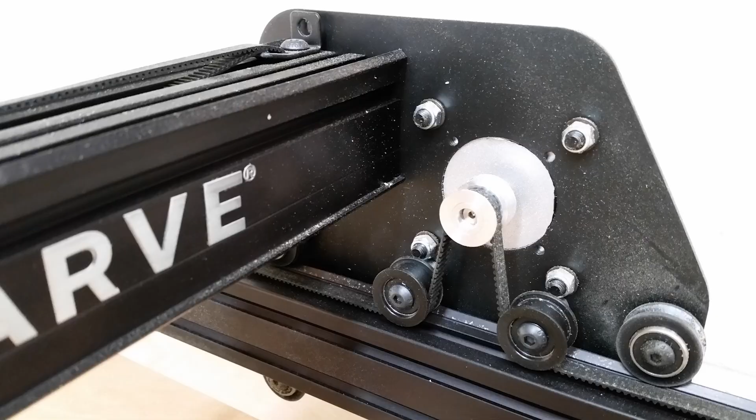There's lots of wires that need to be hooked up and run. You even have to build your power supply and put this whole unit together. Now the power supply itself, the box, came put together, but then you have to do some other things. There is some light soldering involved, so you need to be able to solder or have a soldering iron or know someone to do that.

Other than that, basic tools put this together, not too difficult - Allen wrenches, some open-end wrenches, and some star bits, Torx bits excuse me. Very easy to put together, just takes a lot of time. Be patient with it. It's a lot of fun if you just take your time.

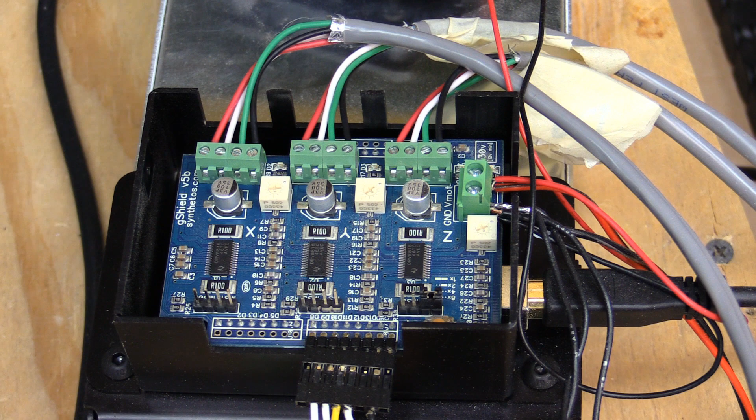After I got it all together, I had a small issue with the unit - it was cutting very erratically, and I was at a complete loss. Again, their website helped me out, and I found out underneath the fan here, there are some X, Y, and Z axis settings that I just needed to change a little bit with a screwdriver, and all was well. So this thing works great, it's a lot of fun to do.

Another thing is you don't need any expensive software on your computer to run this. XCarve has their own browser-based program for this called Easel. So you can log in through Inventables, get signed into Easel, and you can create what you want to do directly on that program, or you can import an SVG file.

That was one of the most difficult parts for me - figuring out how to go from a JPEG to an SVG. Then I found out there are a few free programs on the internet where you upload it and you could just convert it to an SVG, and life's been grand since then.

So what we're going to do is step you through the Easel program right now, and show you how simple it is to set up a project. What you need to do is open the Easel app, which you get through Inventables.com, and then sign in.

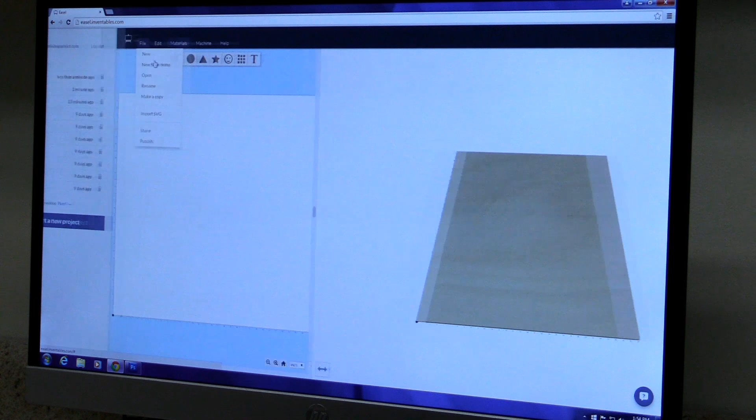Once you sign in, it's going to look like this. What I've just done is import an SVG file I had converted on the web, which is our new logo for Workshopaddict.com. From here, we're going to resize the image, which is as easy as drag and dropping.

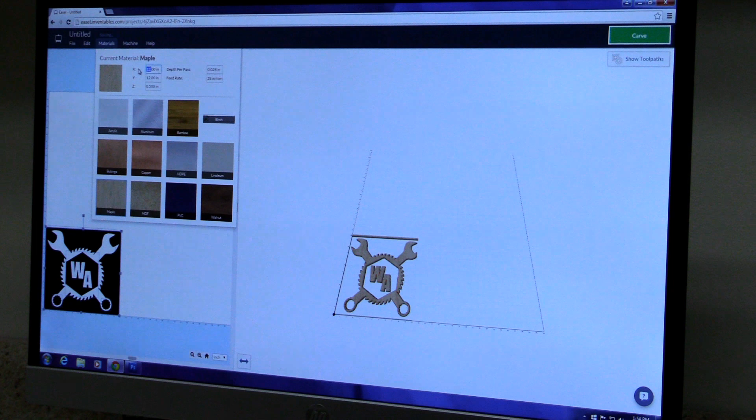We're also going to change our material type, which is important because that sets your spindle speed or the speed of the XCarve. And we need to tell it how big our workpiece is - simply set up your X, Y, and Z axis, telling it how deep, wide, and tall it is.

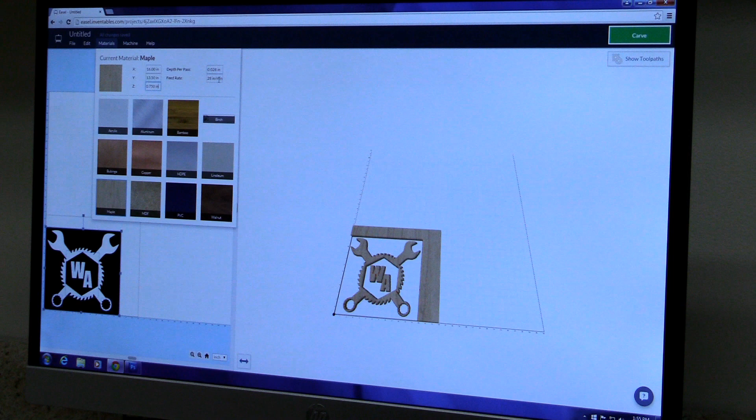Very simple to do, and it's explained well on the website. I'm changing the speed of the unit right now - with the 24-volt spindle it will already be set for you, but with the DeWalt, I'm going to speed it up a little bit.

Now I'm going to center my project and change the depth. I don't want to cut all the way through the wood - I'm only going to cut a quarter inch into it.

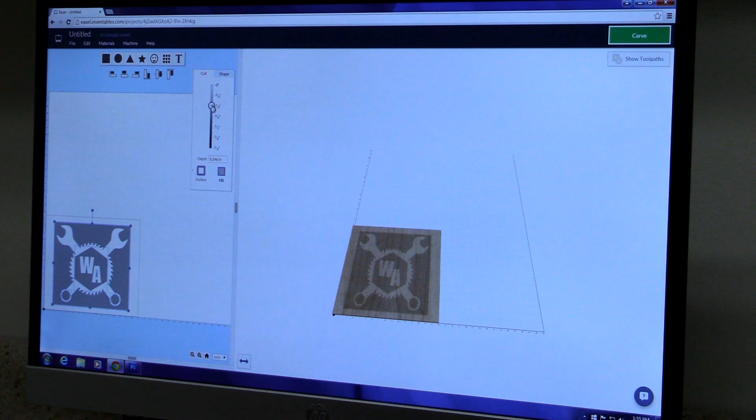Now you can either outline it or fill it. I've switched over to an outline, and I'm going to go through the options here to see what the image is going to look like. It previews it whenever you change another selection.

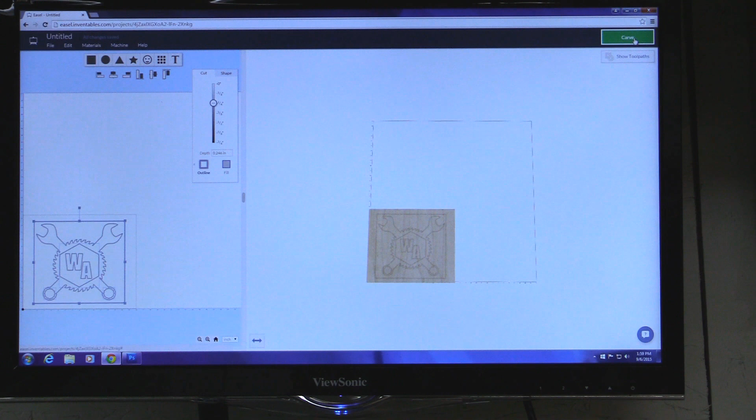Now that you're all set up, it's time to hit carve. That takes you through some sequences to make sure your XCarve is set up correctly - it steps you right through with easy questions, like what size your bit is.

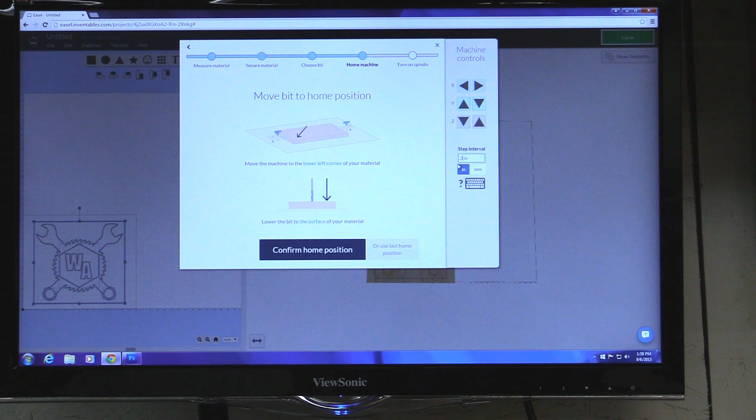Now we're going to home the bit and tell it where the 0,0,0 point is. This is a step that's extremely important to be careful with, because you can configure your XCarve a couple different ways. You can have limit switches on it, which should help move it into the right position. But if you're not careful and go down too far on your Z-axis, you could drive the bit directly into your workpiece without it spinning, which is not good for the system.

So take your time and make sure you do small increments, especially when going down with the Z-axis. I've had this happen once, and there's really no way to stop it while it's moving down. Once you have it at 0,0,0 in your home location, you're ready to continue on.

What you can't see well here is I'm using a wireless mouse and keyboard to change my values and click it over to its home location. It usually takes a few seconds, but it's not hard to do.

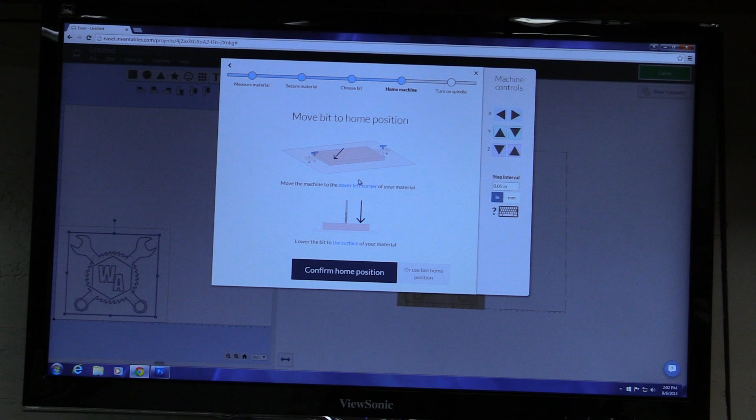Now that you've set your home position, it's time to let Easel know where it is. It steps you through a few more questions, like turning your spindle on and confirming that it's on. Once that's done, a little green button says start carving. Once you click that, you will actually be going live.

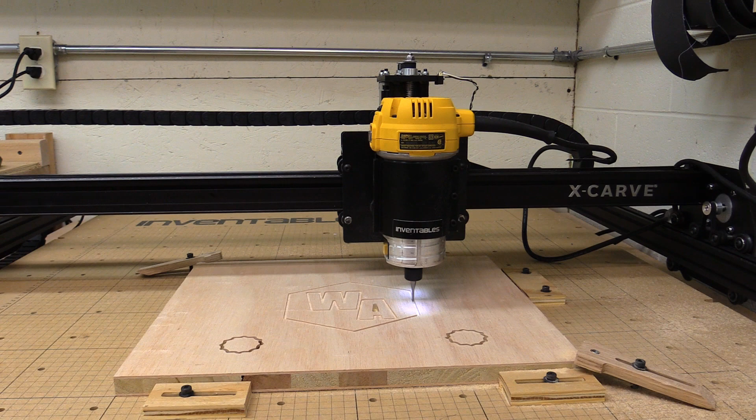As you can see, with the speed of the spindle and the unit moving, projects can take quite a bit of time - this project took about 2 hours to complete. There's a little guide on the Easel program that tells you approximately what percentage of your project is done, so you have an idea.

Once your XCarve has reached the end of its depth and is done carving, it will pull itself out and return back to the home position.

But you can see here by all the stuff I have laying around that I've been having fun with this unit, and I've got all these ideas for new projects coming out in my head. So I'm going to get to work and make some more things. And until next time, I'm John from Workshopaddict.com. Talk to you later.